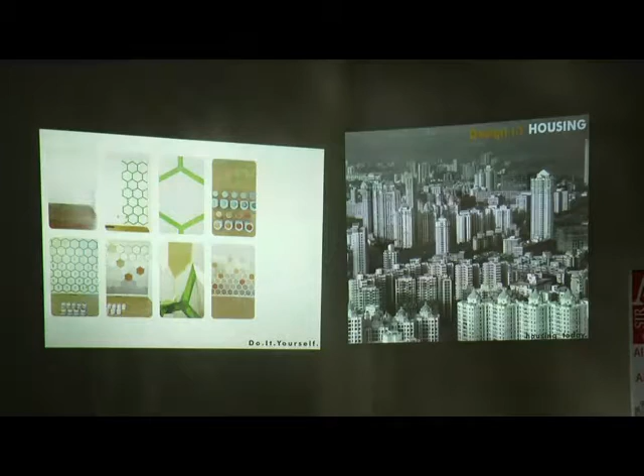We were very interested in that, and looked at what else is happening in the world of design. There are lots of trends one tends to see. The simplest thing people do to personalize things is a do-it-yourself approach, where you create individuation based on what you like. Today, everything from cars to clothes can be personalized, and even large companies help you do that, so you have a very individual ownership of the article you buy or wear.

At the same time, product designers are looking at mass production happening through machines, but also at how to leave the mark of production onto these objects, so every object is different even though it's mass produced. With that stool, the process is such that it's inflated with air, and every time the air fills the metal stool in a different way, so every object, even though mass produced, is very different.

Similarly, you get the idea of crowdsourcing, which is very common as well—involving a lot of people across spectrums, with technology and mass media, to come up with things that are not the hand of an individual alone.

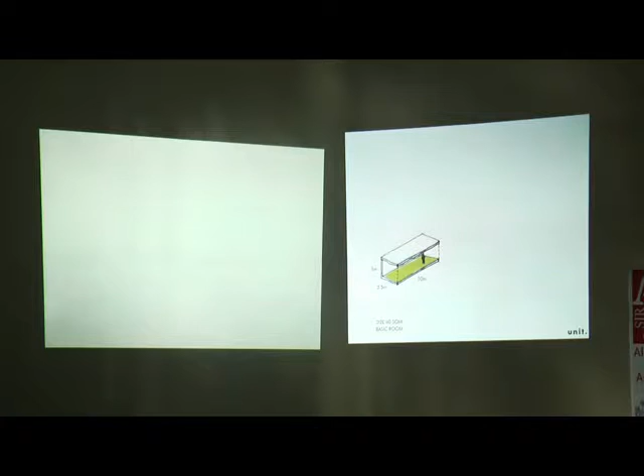What we thought could happen is, what if you raise this height to 4.5 meters, and that additional volume would give you the possibility to add a loft inside—which, besides adding cubic feet to your house, allows you to add this small loft, which can become an individual half room, so to speak.

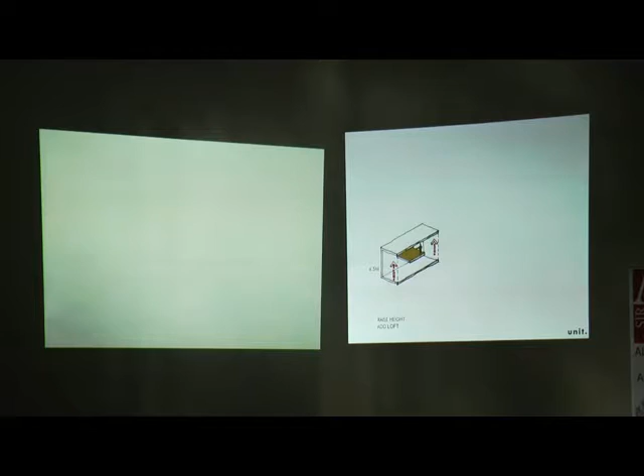This was also inspired by the existing buildings on site, these old semi-colonial inspired buildings where you have nice good heights—it's a way to deal with our climate as well, so hot humid air is exhausted through the higher levels.

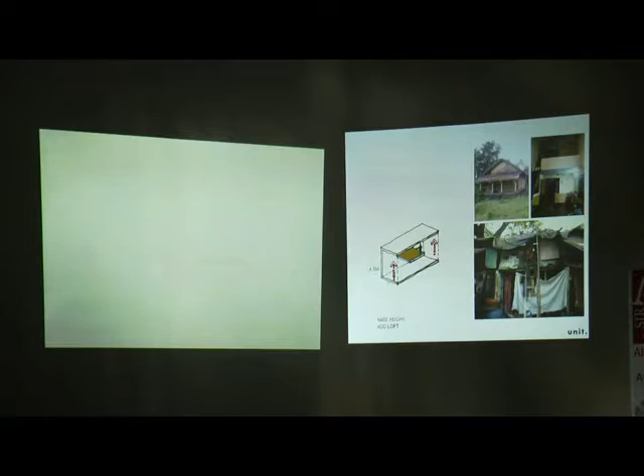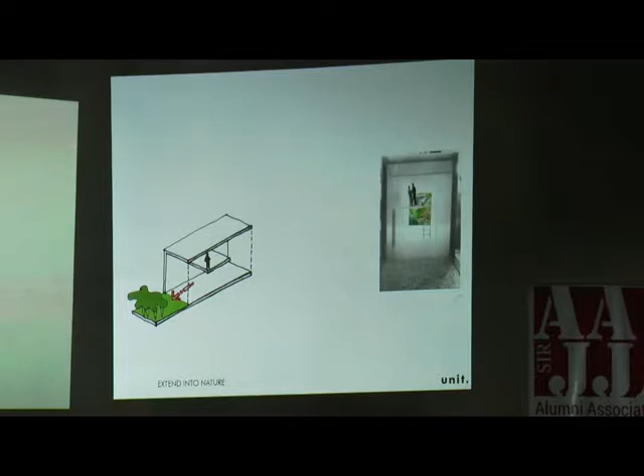And what you would find in informal settlements as well, where even in the smallest of footprints, people would add a small loft to help double their area or increase it. So with that basic unit, we said, what if you attach a small terrace to each of these houses, and that becomes your extension and connection to nature.

So the entire housing complex is designed on this module of 3.5 meters, and one begins to see a variety of types emerge from this simple configuration of this tube. Even the commercial component, the banquet halls and everything, are all worked out with this module. I think to look at mass housing, one has to look at a certain amount of efficiencies built into the system, and the module really helps achieve that.

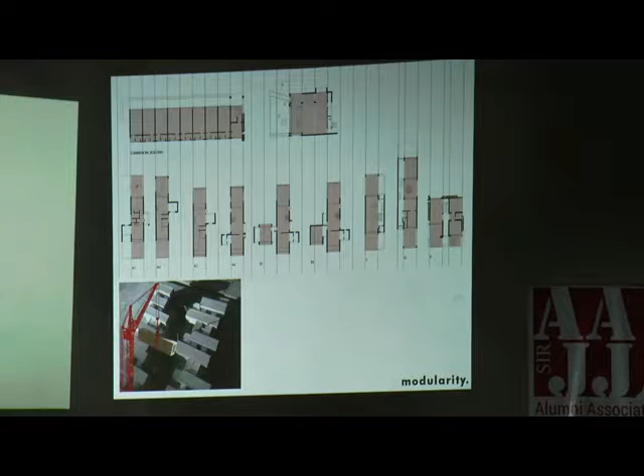At one point we were actually looking at whether one could precast these elements for faster construction. That's not what we eventually ended up doing, but it was very strongly considered at that point. But then we said, is this all we can do? Can we actually do far more than this?

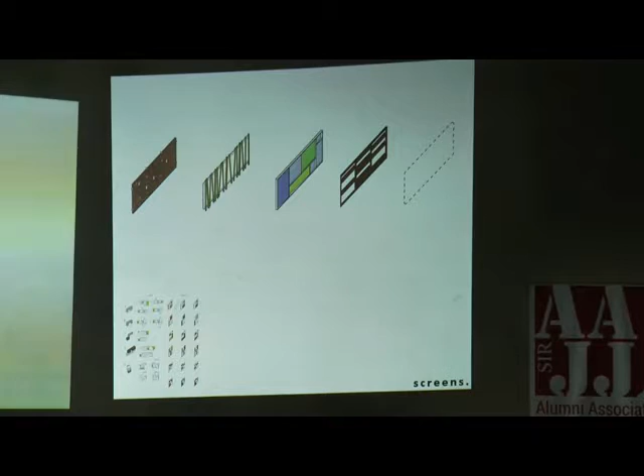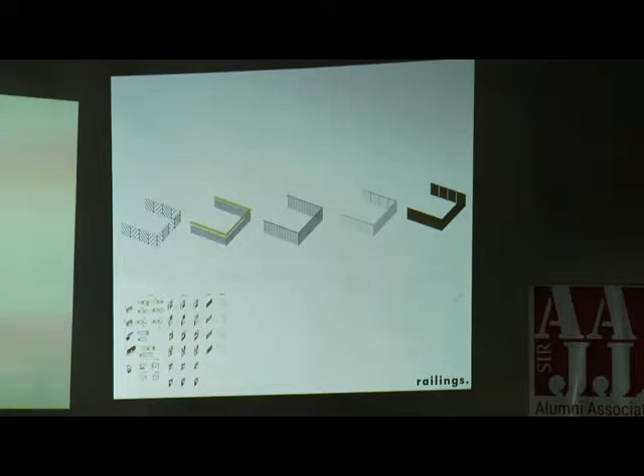We went to the next stage, where we looked at a lot of elements that constitute the house, and we can just go through some of these. These are some screens that happen in a house. These are some of the railings. So instead of just doing one standard railing across the entire complex, what if you had 5 different types of railings that people could actually choose from?

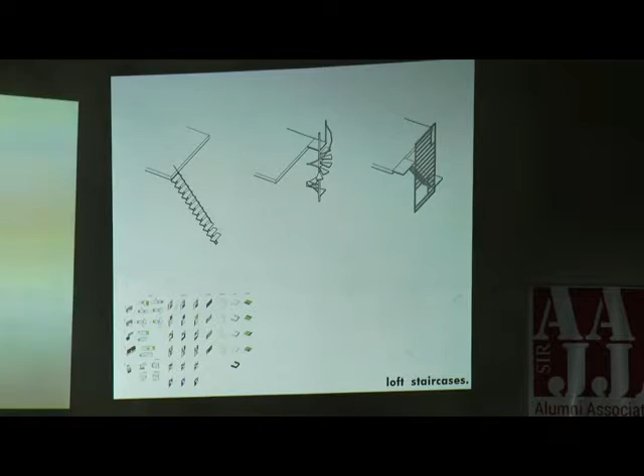Similarly, we had these lofts, and there are 3 different configurations of staircases. One is like a little spiral, one is a straight ladder, one is a linear staircase. And what begins to happen then is— actually, sorry, I think I missed a few slides, but anyway.

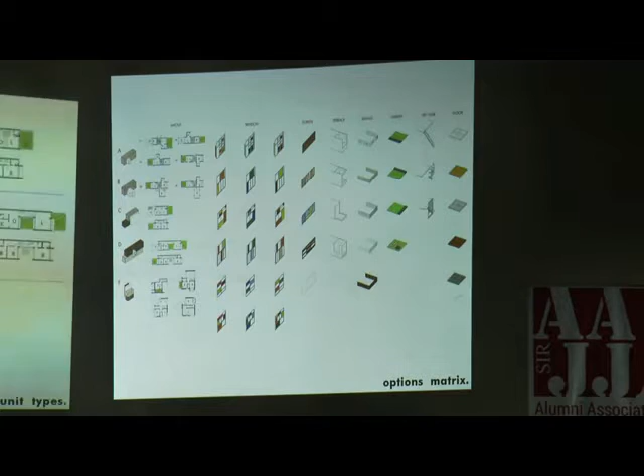So you get this kind of matrix that begins to emerge, of different house sizes. So you have everything from a 1.5 BHK to a 5 BHK villa, and you begin to get—

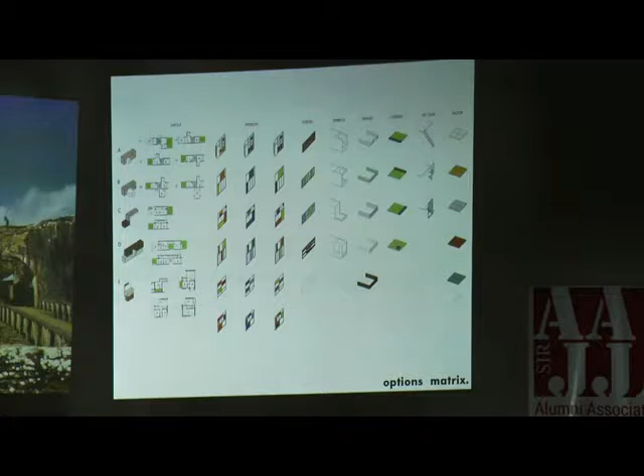Where did it go? It shut down.

So you get a matrix where, like I was saying, you can choose the size of the house. For example, if you look at the top left house size, which is 40 square meters, even within that you're getting 4 different configurations which you could pick from. Similarly, you have a 2.5 BHK which has 2 different types, and then there's a 5 BHK villa, or 2 different types of 2 BHK and 3 BHK row house.

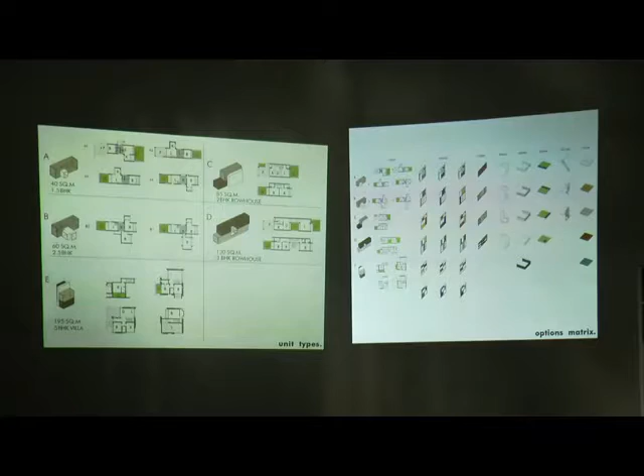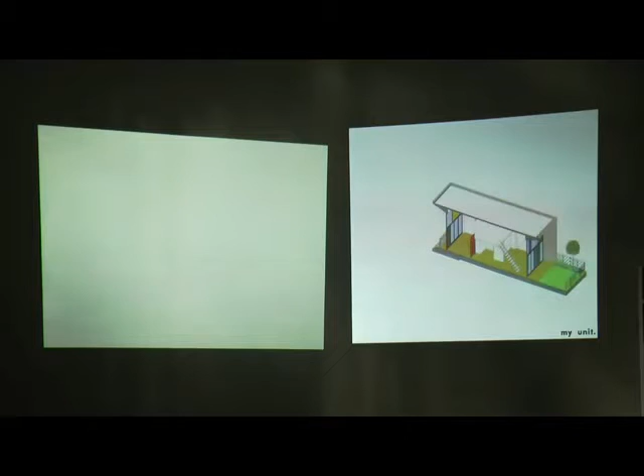So there's an incredible variety of house sizes and configurations within those sizes, and everything from a window to a screen to the terraces, your railings, the kind of garden you have—everything can be configured as per your liking, extending all the way to your flooring, your colors, the bathroom tiles. And of course this is not endless, so we have a pick of 4 to 5 of these, and then people could pick whatever they like within that. So you could create, in some sense, your own unit based on the choices you make.

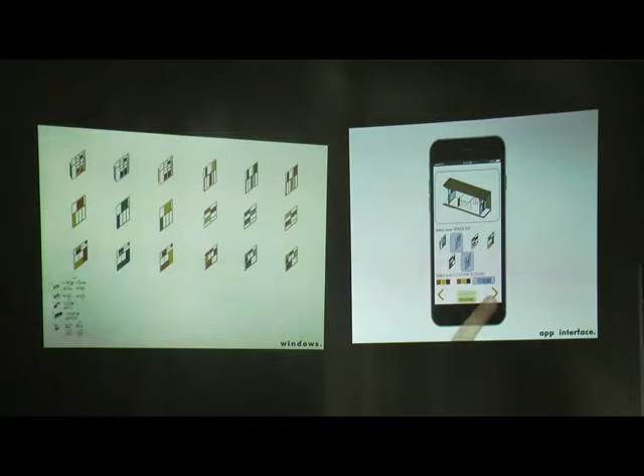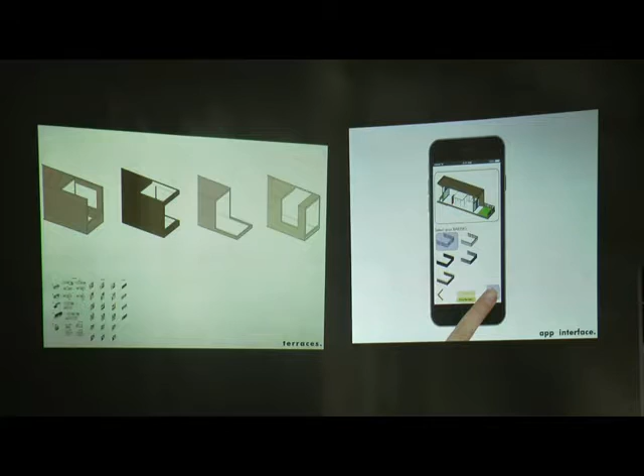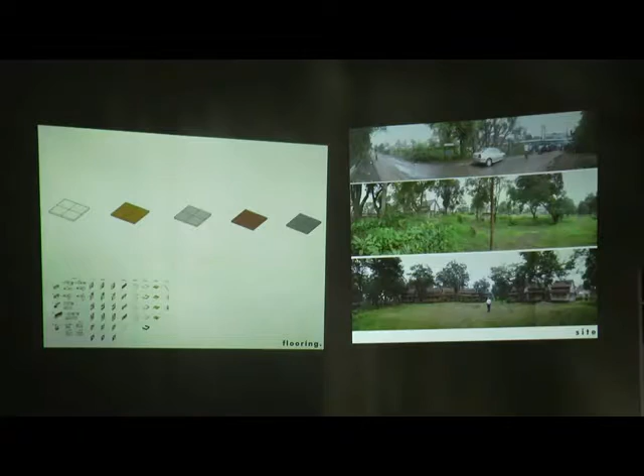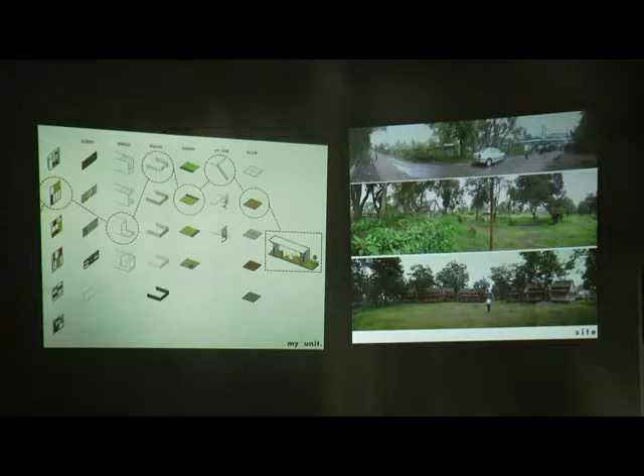This diagram shows you that you can pick all of these things to create your own unit. I think we're running one or two slides behind, but let's come back to this.

So this is the actual site as we found it. It's a 4-acre lot in Lonavala, which was an old Parsi sanatorium with lovely mature trees and a fair number of existing houses. The only negative, if one can call it that, is that it touches the train line, and one can see on the topmost slide that it's at a fatak, a railway crossing, where trains go right by. So that's the context of the physical site we were dealing with.

We're going to show how we took that basic unit we designed, a tube, and put it together to create a plan for the entire complex. So this is the basic tube that one sees.

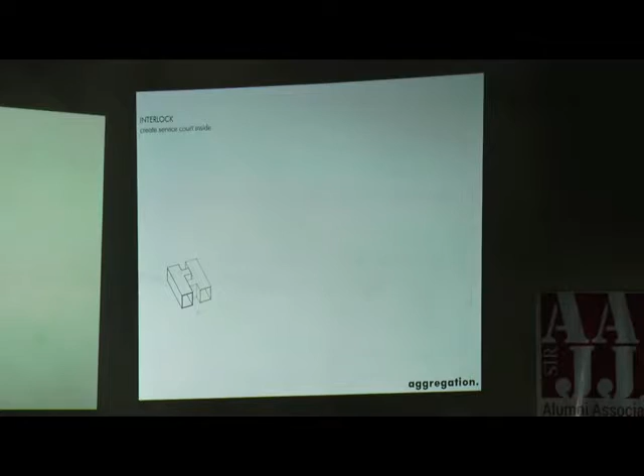What we've done is add a branch to it, which primarily contains all the service spaces, like a toilet or kitchen. We flip that diagonally, and the two interlocking units create a kind of courtyard in the middle, which is a service courtyard. So all our plumbing is taken in there, along with air conditioning units or other services, so they don't spoil the front or back of the units.

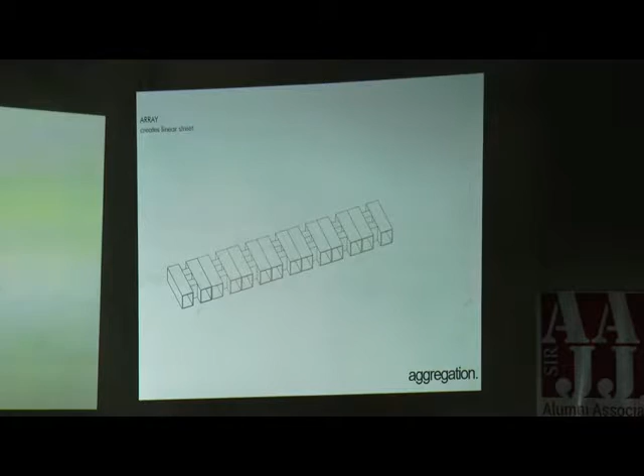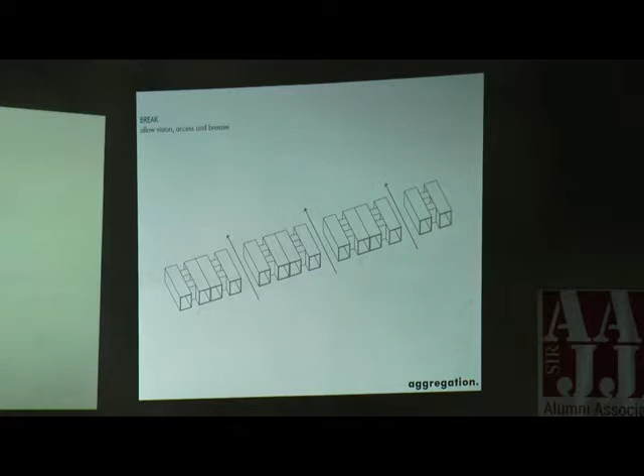We array this unit in a linear fashion to create a kind of street. We then break that street length that emerges, to allow breezes to flow through, to allow access through that linear wall-like building, and to allow for vision in between these units.

We then stagger them to create a unique condition. This was really helpful because of the amount of trees on site - we could slip and slide some of these units so we could dodge a tree or account for the presence of some feature on the site.

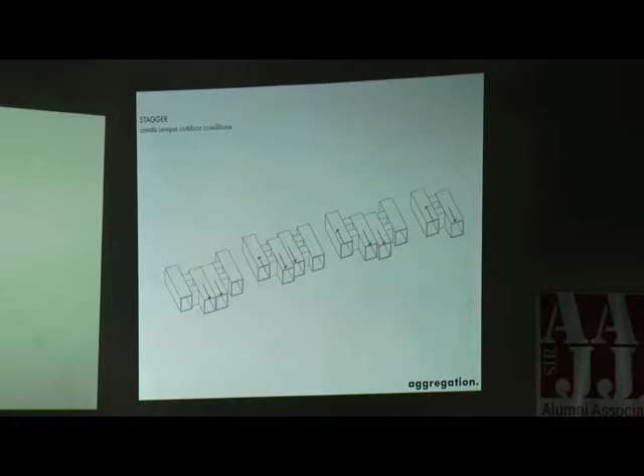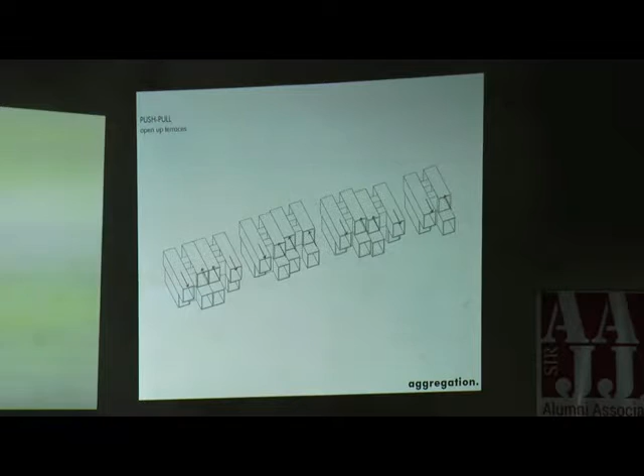Then we stack this configuration above, just repeating it, and we push and pull the top levels as well, which creates terraces at the upper level so everybody essentially has green space. So primarily the ground floor units all have gardens at the back, and everybody on the upper level ends up having gardens in the front.

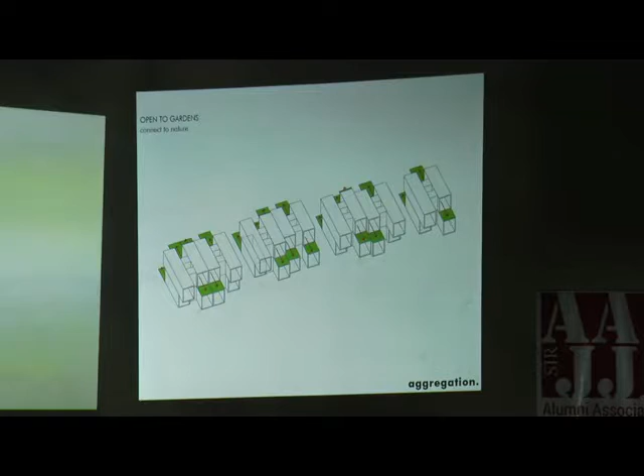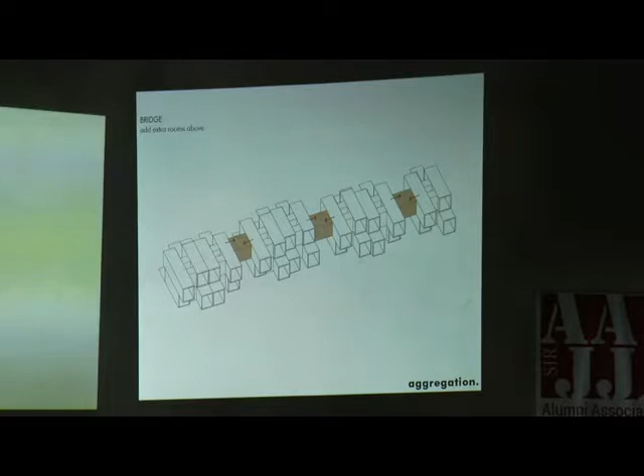So everybody essentially has a nice double height space, 14.5 feet, with a loft and a garden attached. In these gaps that were there, we add units at the top level with one room attached to each of the side blocks, which allows a 1.5 BHK to become a 2.5 BHK, while leaving the lower level free for breezes and sightlines to pass through.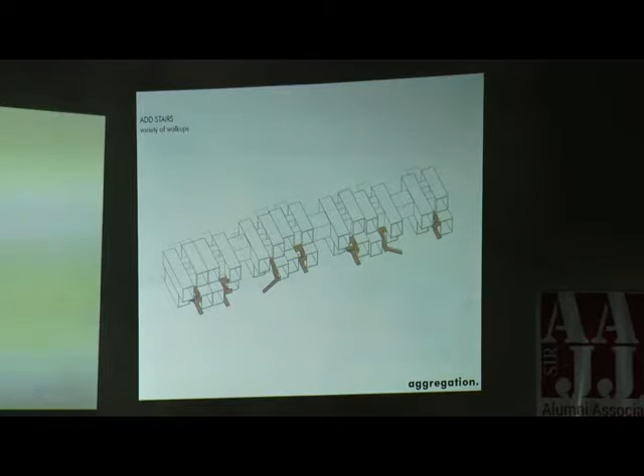To these we've attached a series of staircases, which become walk-ups. We're not really interested in putting a staircase into a box, but in pulling them out of the building where you can see the activity of people walking up and down, creating some kind of life on that street.

And then there are these additions of stone walls which ground the building, so to speak. I think this will become a little clearer as we see the photographs.

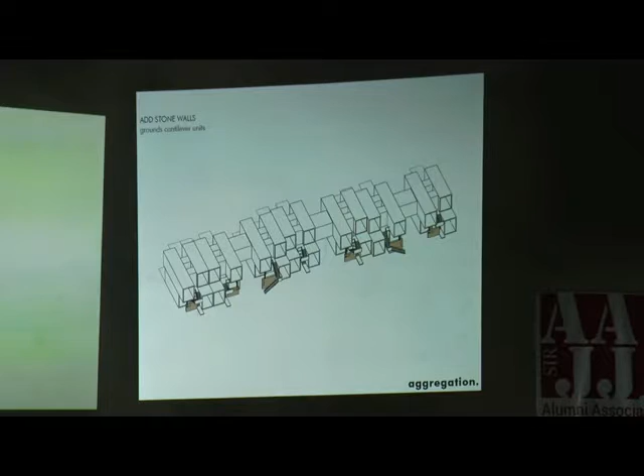So this is the shape of the site with the approach road and the railway track. What we've done is place the commercial building right in the front. It's set back a little from the street to become a gateway building which welcomes you from that very busy junction.

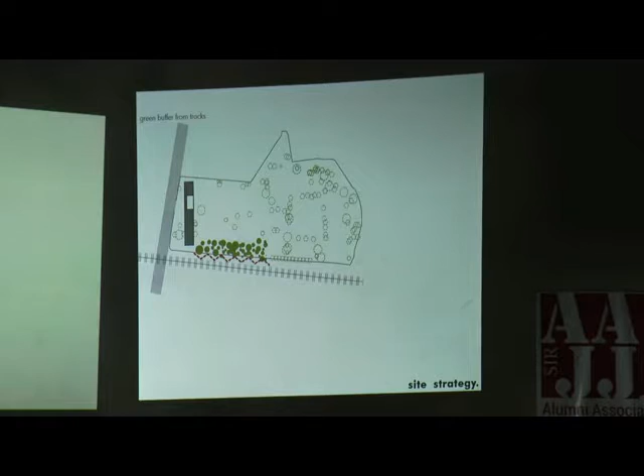Along the railway track, also at the insistence of the client, we created a green buffer zone which perceptually sets the units back from the noise of the railway line. Then there's a street created by the configuration of units on both sides, giving you a varied morphology that evolves as a linear thing but never gets monotonous.

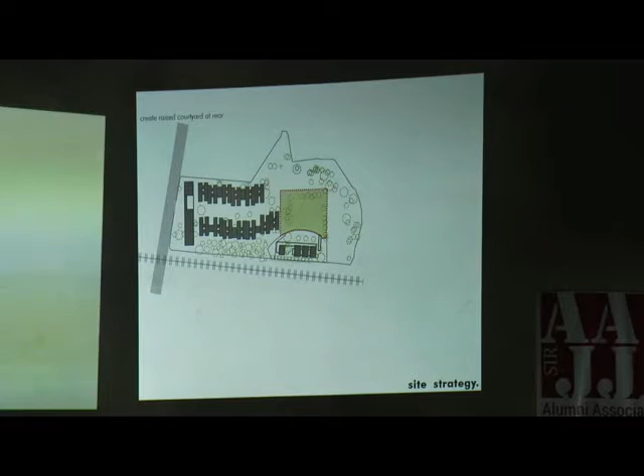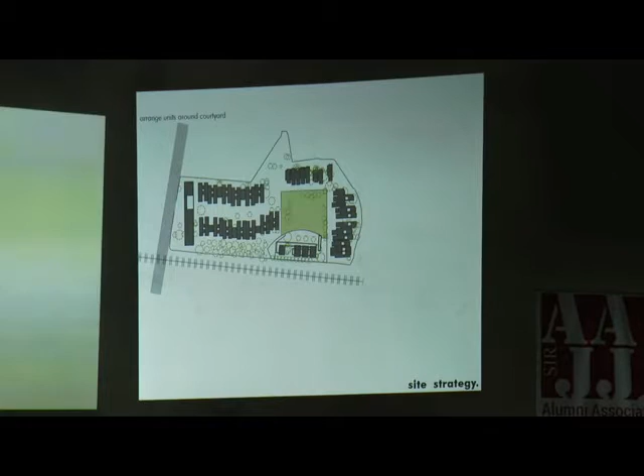At the same time, like you saw in an earlier site image, we fought really hard to save at least 3 of these buildings, which we converted to a common space for the entire complex, becoming a clubhouse and multi-purpose hall. The end, raised almost 1.5 meters above road level, we created as a raised rear courtyard, with a similar series of units forming that courtyard at the rear, and placed within it are 3 large size villas.

So you again get this kind of configuration like we were talking about, a mix of unit sizes and program types distributed right across the entire site.

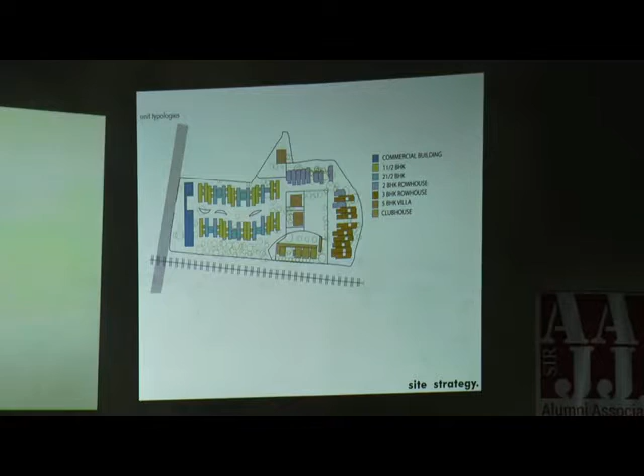If you look at the green, which represents all the private green spaces, you get these small to fairly large gardens for a lot of these units, and the yellow represents all the public space where people can walk around from one space to the other.

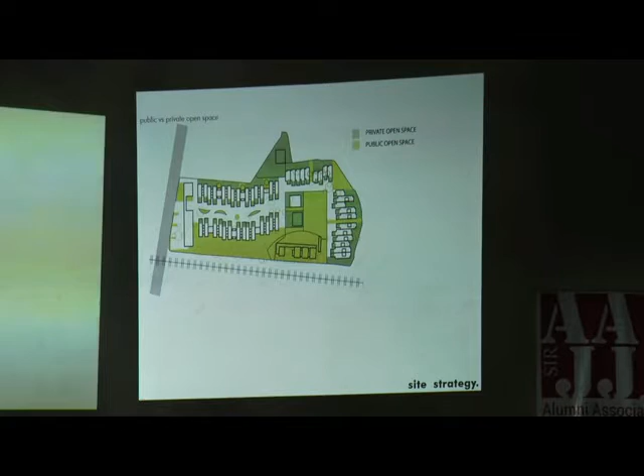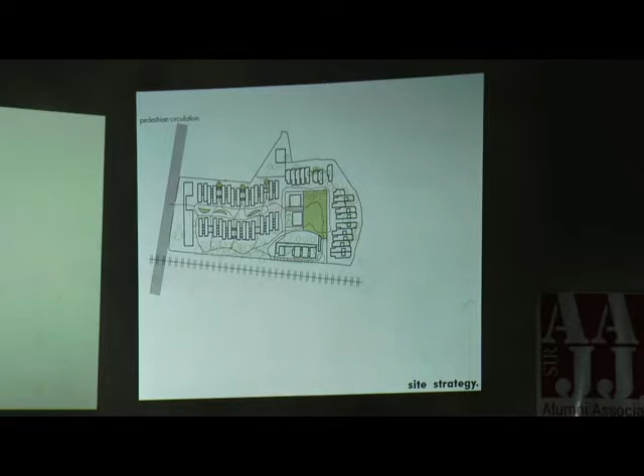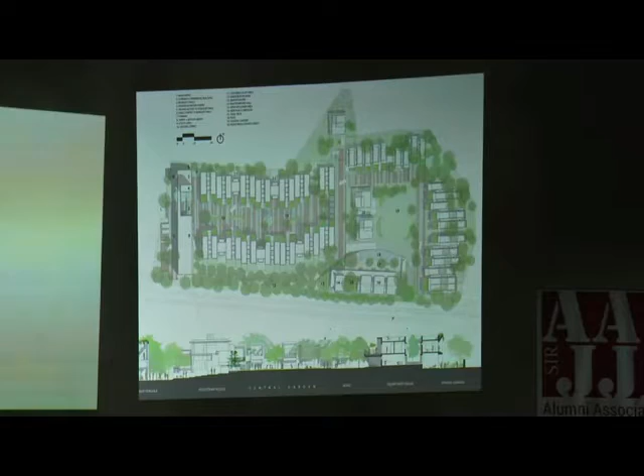This section below shows you that raised platform courtyard at the higher level.

Entrance block, which we were saying, is the commercial component of the program. On the left side there are 2 floors of banquet halls which could be rented out or leased, and on the right is the entire commercial unit, which has shops on the lower floor and offices on the top.

So this is the housing itself as it's built out. You can see the tubes which form the entire stacking of the units.

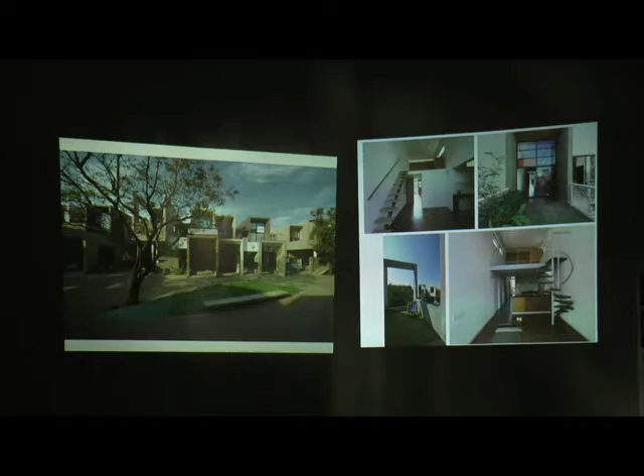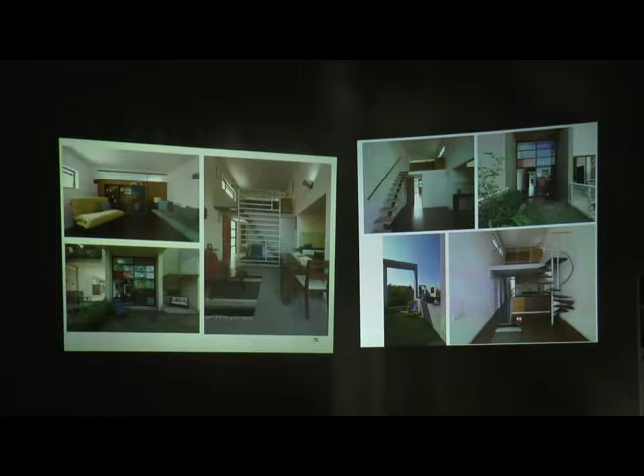So this is the inside of the unit. On the right you can see the three types we are describing. One is with a spiral, a very basic furnished place. The bottom right image shows the kitchen actually underneath the loft, whereas on the left top you can see the kitchen tucked into that little branch that the tube has.

So there is a lot of flexibility and variety of types that emerge, and people could choose whether they want a kitchen that's slightly tucked away, or one that's completely open and part of their living space.

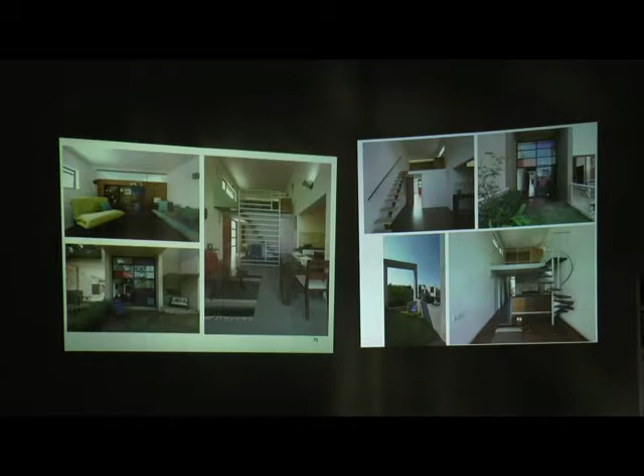This is one of the other smaller units where you can see there's a loft at the top, shown in the top left picture. So there's plenty of light. We also made sure we gave windows to them, not only on one side but on both sides, so you can get direct light and ventilation to those spaces.

In fact, since they have been sold, a lot of people have enclosed them on the front as well to make completely private bedrooms on top. So it's effectively become almost like a second bedroom. They all spill over into this little garden at the back, or on the right side, the upper level terrace.

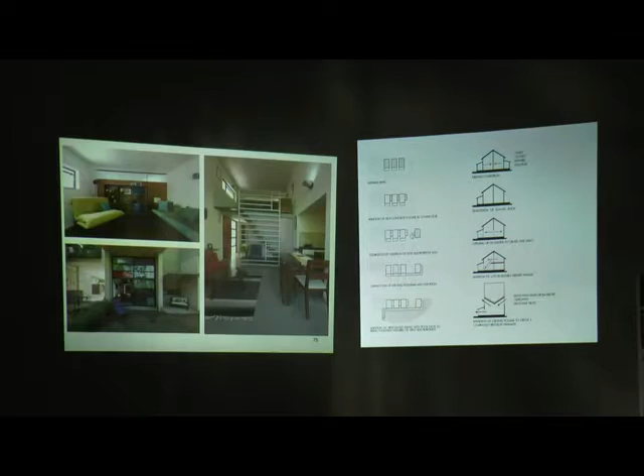This is the clubhouse which we did, and like I was mentioning, we fought really hard to save some of these buildings. There was an initial proposal where we tried to save all of them, but we weren't able to manage that, because this has been done within a mainstream developer model. So there are constraints already there, and to push ourselves doing all of what we just described, it was rather difficult to convince a client to let FSI go, which for them is really, really sacred.

So there was a set of three buildings really close to each other, and the ones on the left are the condition they were in before we got there—fairly good stock, stable buildings.

What we did is, if you see the diagramming on the right hand side slide, there were these three blocks which we connected by the addition of small pieces in the middle, and that helped link all three blocks together.

There was an additional requirement of a multi-purpose hall, and we couldn't attach it immediately because there was a grove of trees right next to them. So we left a little courtyard and added that block on the right, then extruded the existing verandah to connect all three and the fourth block, wrapping the verandah around, interlinking all four separate buildings together.

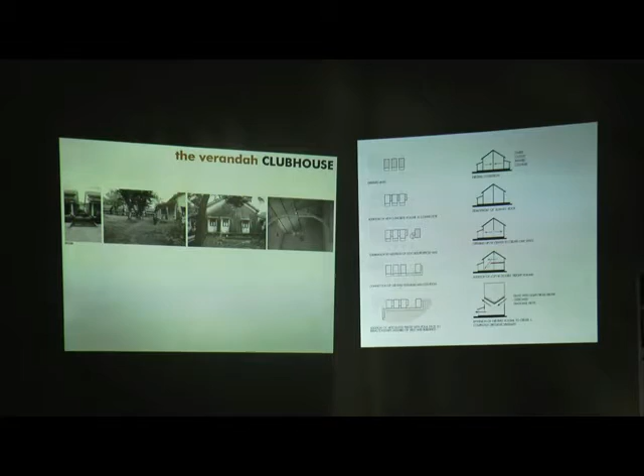So it's completely turned around, and what that does is invert the spatiality that is happening in the older buildings, where you have a very protected top and very little light coming in, whereas here this space, being a multi-purpose hall, is flooded with natural light. We also opened up in plan views along the diagonal, so you don't get this sense of constrained space that you get in the original villas.

If you see that end block on the right, you can see that the corner actually opens out and begins to link back to the pool deck, the courtyard, and the pool area itself. Whereas the others, because their corners are really held, have a very contained and traditional sense of space.

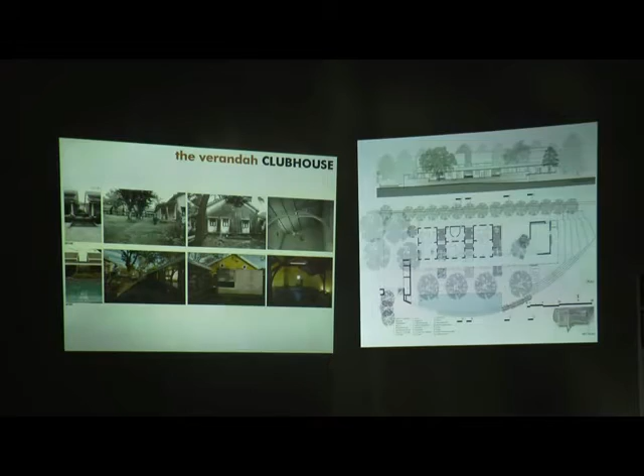So these are some of the sections. The top is through the reading loft, and the second section is through this little concrete volume that we've added, which becomes like a connector through the space.

I'm just going to go back a little bit. So the little grays that you see between the existing buildings are actually where we chose to put the service spaces. The changing rooms, the toilets, the showers are all distributed in that space.

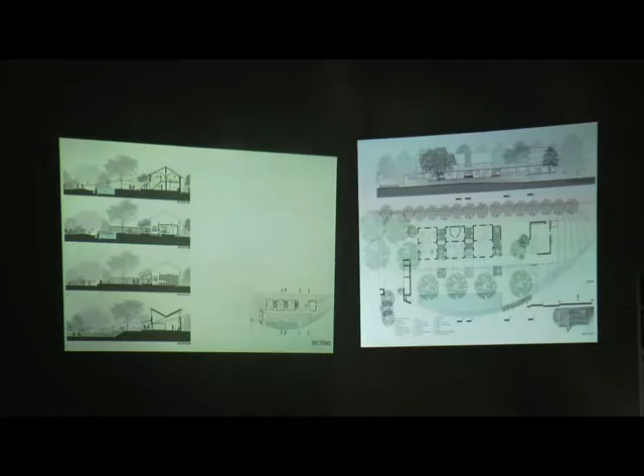This is the linked extended veranda. It was very interesting that we actually created this out of nothing, because all the other buildings that were being dismantled, we picked all the stone of the plinths, the columns, the bases, the rafters, the boarding and the tile. Everything has actually come out of the older buildings, so we just reused all of that to extend this veranda right across.

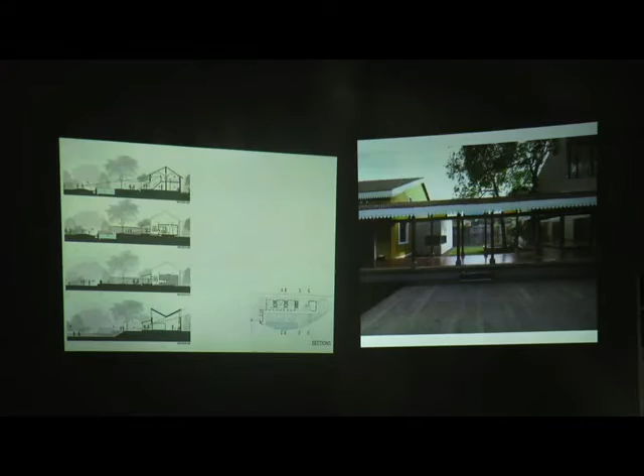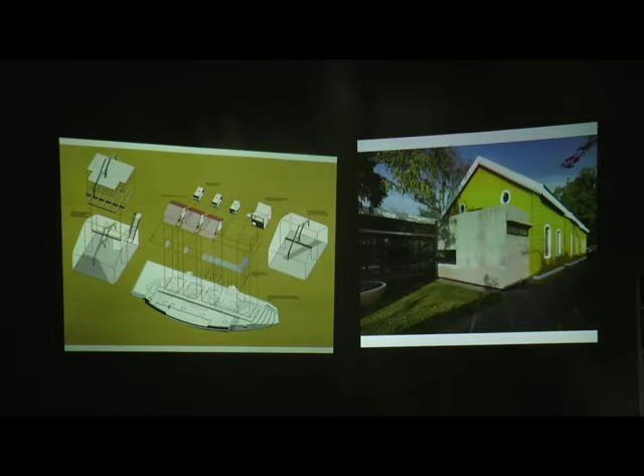So that's the extended veranda, which, like I was mentioning, is created out of all reused material.

These are the kind of units. So this is the end unit that you can see. It has a little built-in bench. We've done this in concrete - it's all exposed concrete, one singular monolithic material that just creates all the spaces within.

And then there are toilets. So this is the common lounge area with the new steel loft, and that's the reading room that happens above. We also inserted some of these old heritage Minton tiles over there.

We didn't have the budget, honestly, for all of it, and we were asked to do only a certain area, but instead of creating these patches like you'd find in older buildings, we've done these more like a memory of what it was earlier. In some sense, it's almost like the light is streaming through those windows and just highlighting the past.

These are smaller vignettes that you see - like the one on the left, when you sit in that concrete unit, you look out and the views happen only at eye level, and the others are the steam room and the wet areas.

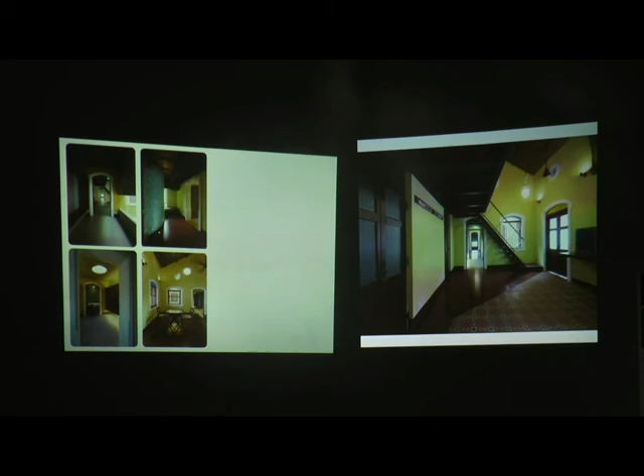This is the gymnasium, and here you can tell the addition of that steel beam that transfers the load of that wooden truss to allow for the whole center to actually open out.

So this is the extension, the new extension, which is the multi-purpose hall, and like you can see, there are these really large sliding doors that open up, and you can trickle out, spill over into that courtyard or right across into the pool deck.